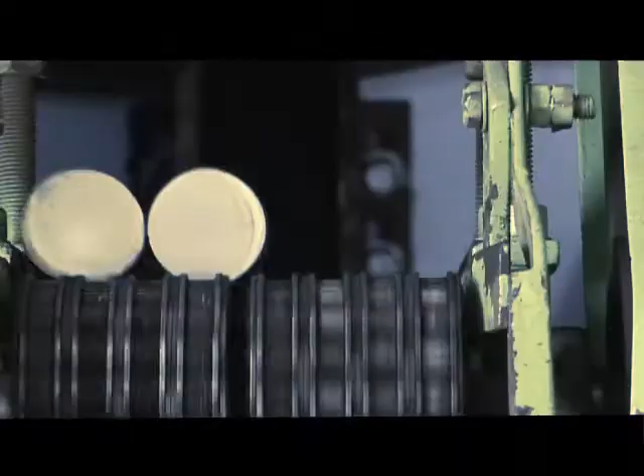Progress, innovation, creativity. To cope with changes in the machine industry of the 21st century, we develop powerful and precise devices, from straight-side hot forging presses to billet chopping presses and peripheral devices, and strive to remain the most trusted business partner. Technologies for companies and consumers, Jaewoo Press is at the heart of them all.

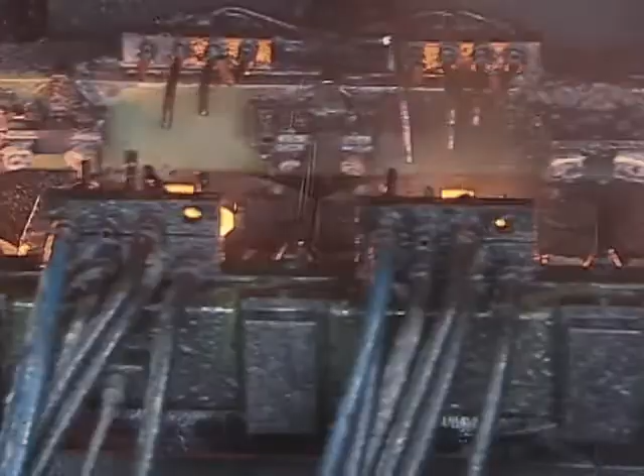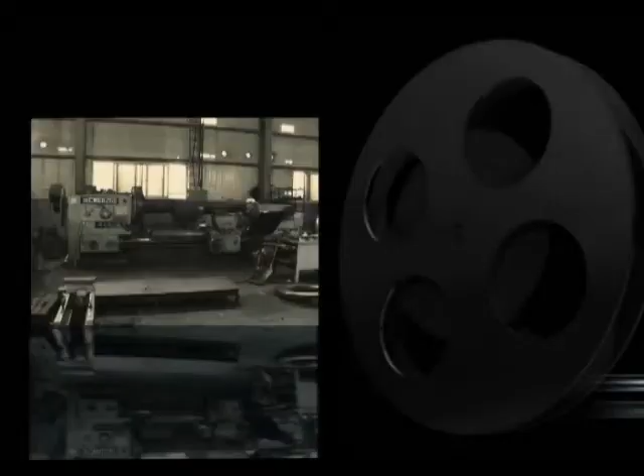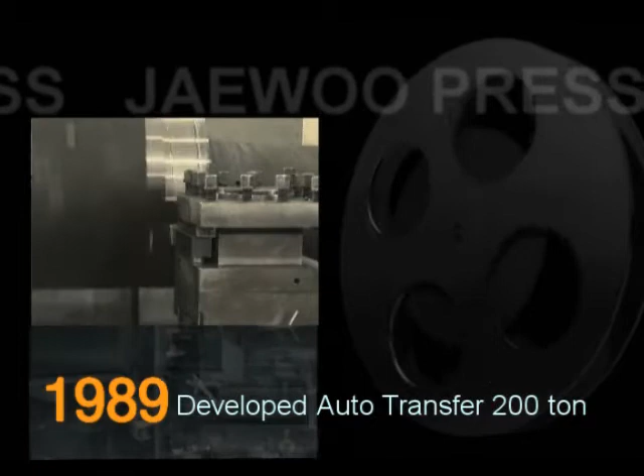Jaewoo Press is located in Ansan, Gyeonggi-do, the mecca of Korea's small and mid-sized companies. 1983, established Dongwoo Industrial Company Limited. 1985, supplied forging presses of 400 ton, 700 ton, 1000 ton, and 1300 ton to the domestic market. 1989, developed auto transfer 200 ton. 1990, developed and began to sell forging press 1600 ton.

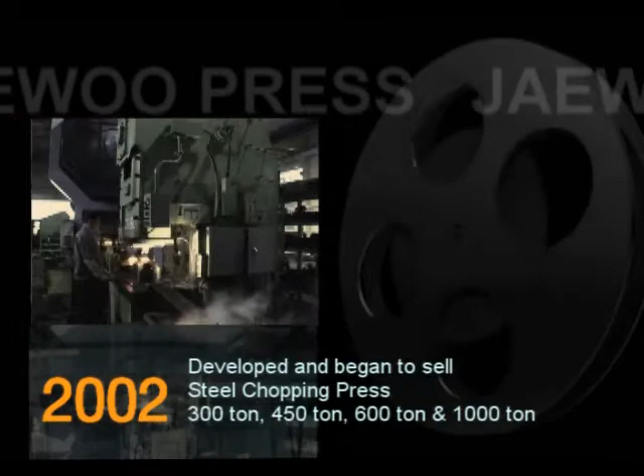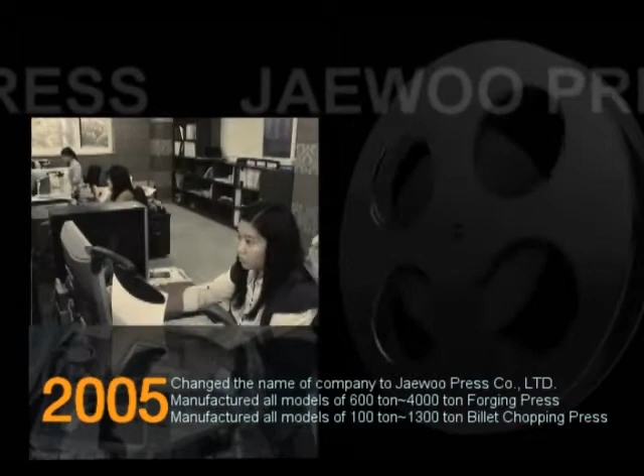1991, developed C-type 1000 ton blanking press. 2002, developed and began to sell steel chopping press 300 ton, 450 ton, 600 ton, and 1000 ton. 2005, changed the name of the company to Jaewoo Press Company Limited. Manufactured all models of forging press, manufactured all models of billet chopping press. The head office was relocated in 2009.

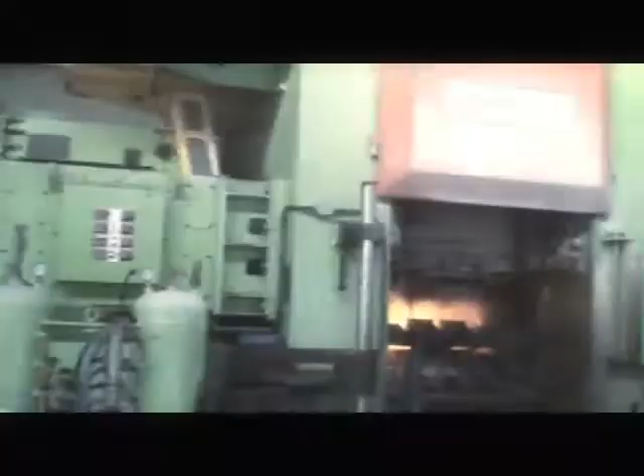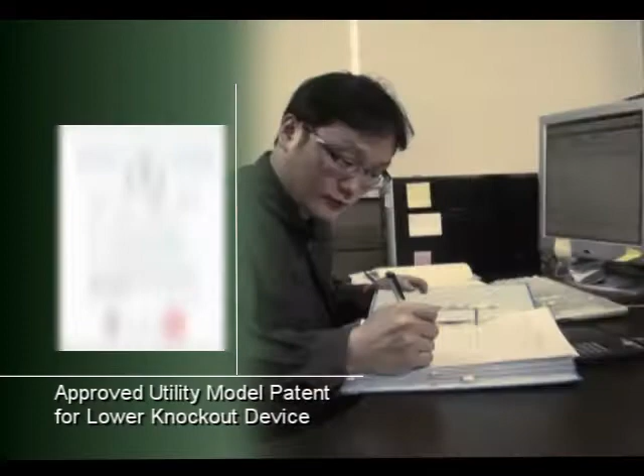And as the leading manufacturer of straight-side hot forging presses, the company is working hard to push the boundaries of Korea's equipment industry with 30 years of know-how and technological expertise. Jaewoo Press has also applied for the patent of the lower knockout device, established the R&D Center, and won the ISO 9001 and ISO 14001 certifications.

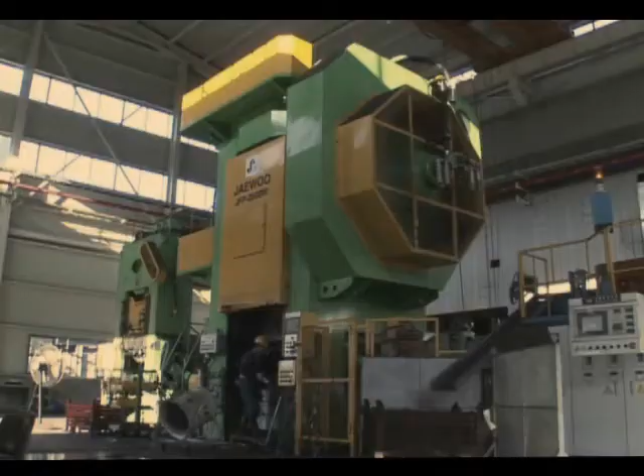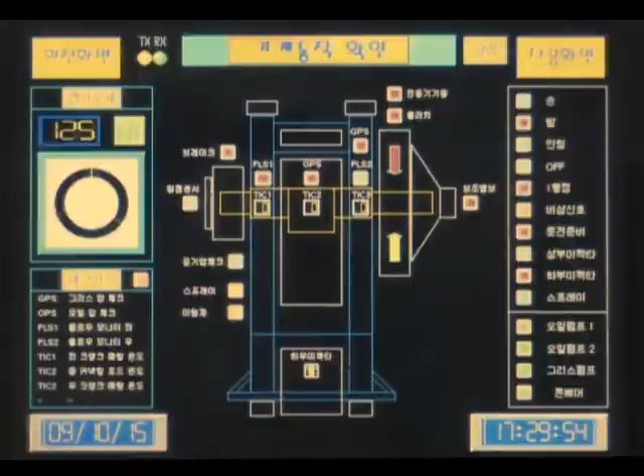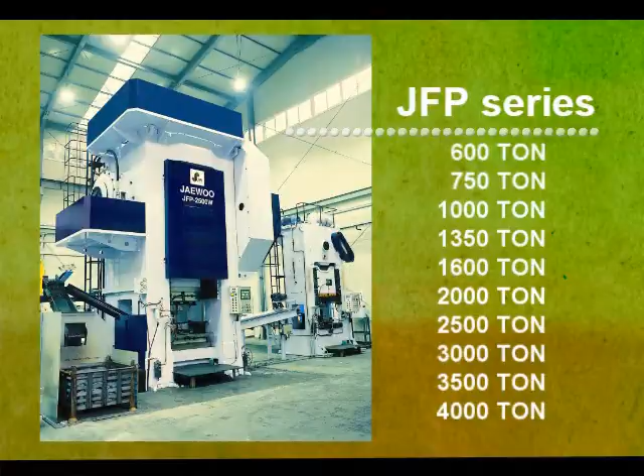Jaewoo Press developed and commercialized the straight-side hot forging press for the first time in Korea and achieved technological independence, emerging as Korea's leading manufacturer of forging presses. Let's move on to detailed information about Jaewoo Press's straight-side hot forging press. First, the capacities range from JFP 600 ton to 4,000 ton. It has a super strength body, a combination of molding and steel structure that protects against transformation, and enhanced life through heat treatment and precision processing.

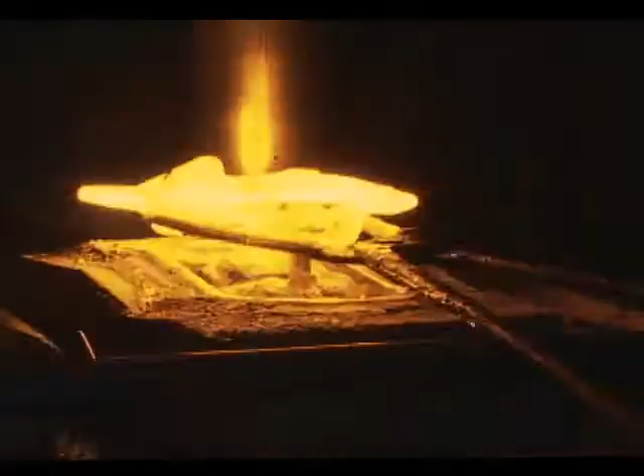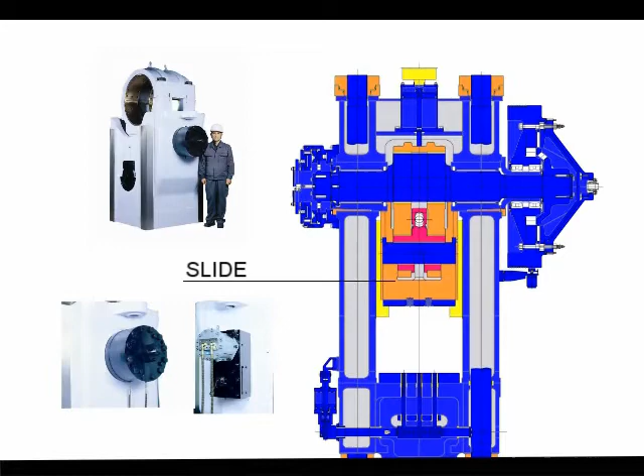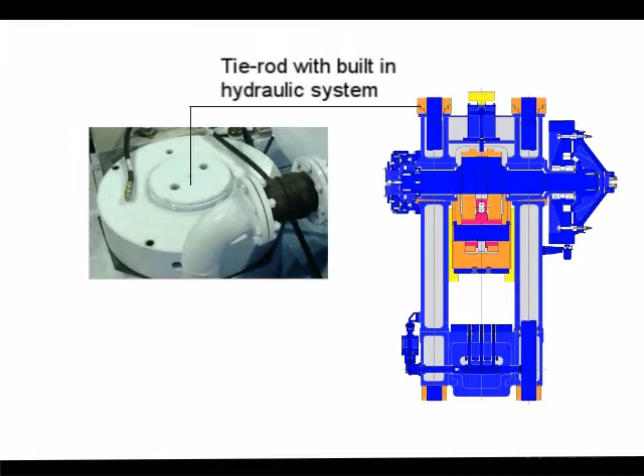The stick release device employs a uniquely designed cylinder and lever utilizing hydraulics for an easier stick release. The tie rod system with built-in hydraulics is assembled with an upper frame and bed, with the tie rod forged by super high pressure to prevent deformation in case of overload and to facilitate the release of stick. The flywheel brake controls the speed of the slide in the case of mold setting and dramatically improves productivity by reducing the mold adjusting time.

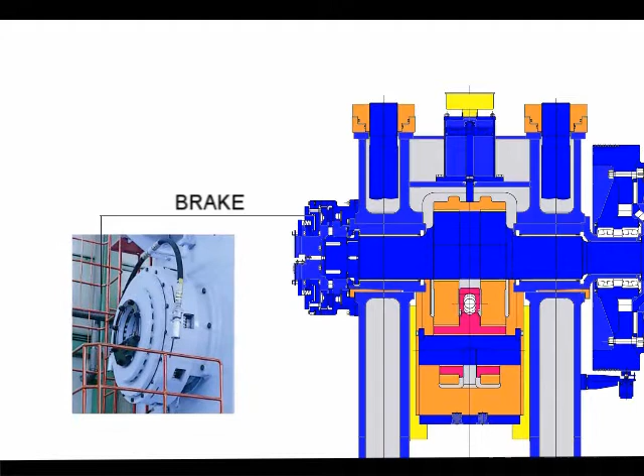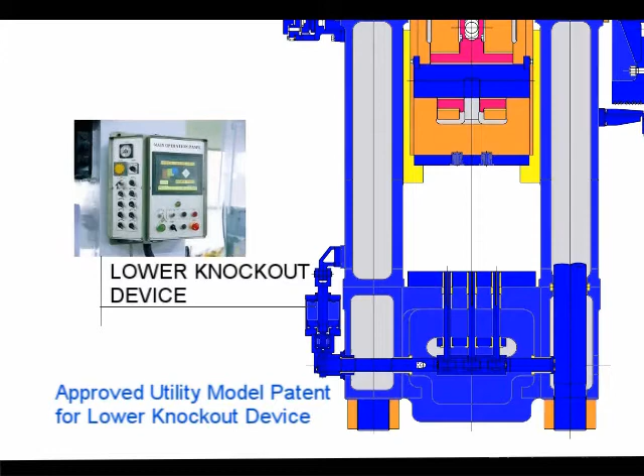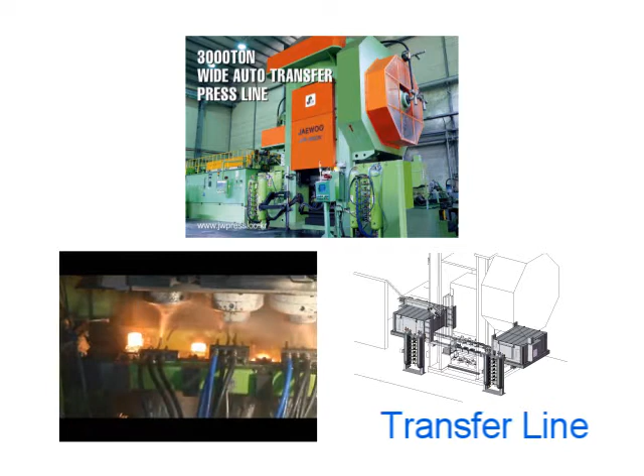The octahedral slide guide and clutch is installed to better cope with eccentric load. The guide can be maneuvered to a minute level, and thus high precision can be maintained. It is an insert type with the clutch and the disc incorporated together. The transfer line is applied with the hydraulic system, which can be freely controlled throughout the entire process, resolving the durability issue of the mechanical system and the position control issue of the auto transfer.

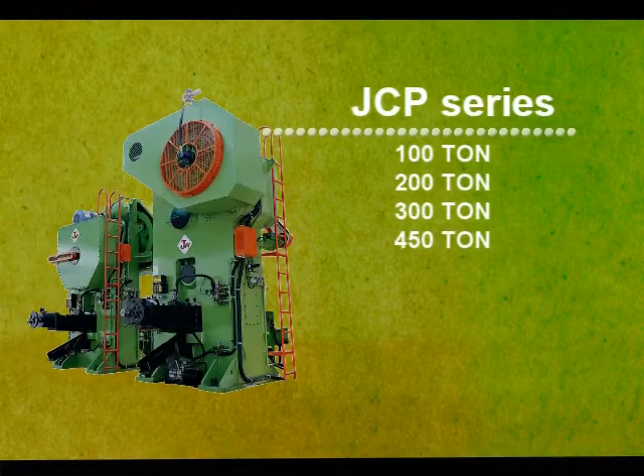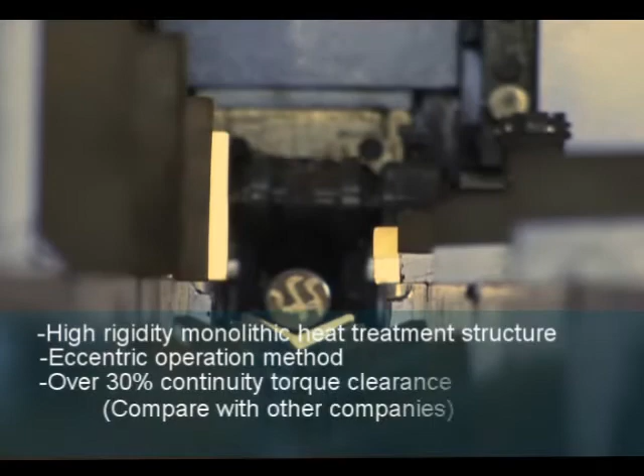Jaewoo Press produces billet chopping presses ranging from JCP 100 ton to 450 ton. The billet chopping press is a super-strength monolithic heat treatment structure employing the eccentric drive. The continuous torque has 30% more allowance than competitors, with minimum material change and precision chopping achieved. Let's take a look at devices mounted on the billet chopping press.

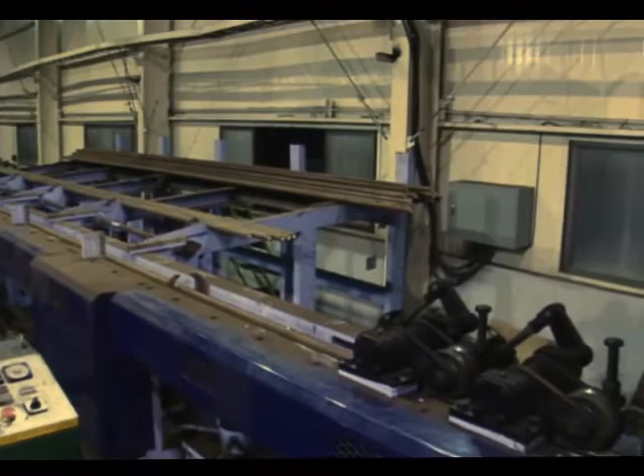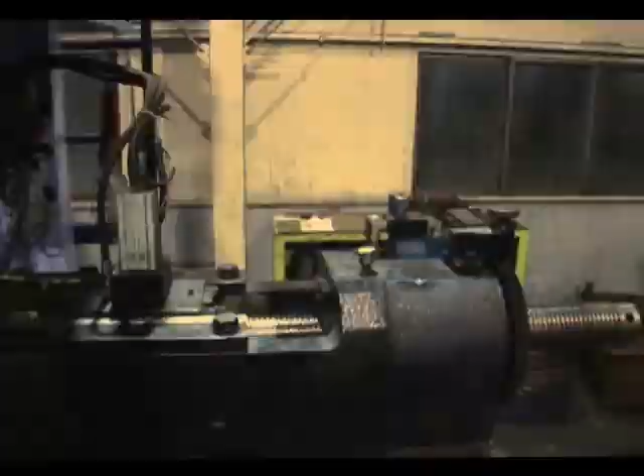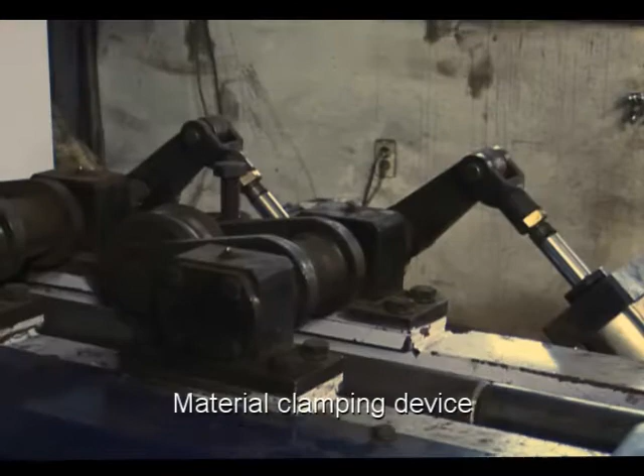The hydraulic stopper drive is easily adjustable with the automatic stopper length adjusting device, and the shock is better absorbed and noise is much reduced when materials are transported from the material damper load frame to the conveyor belt. The material clamping device has a double clamping that prevents backstopping, and the clamp roller prevents the vibration of materials during chopping for increased safety.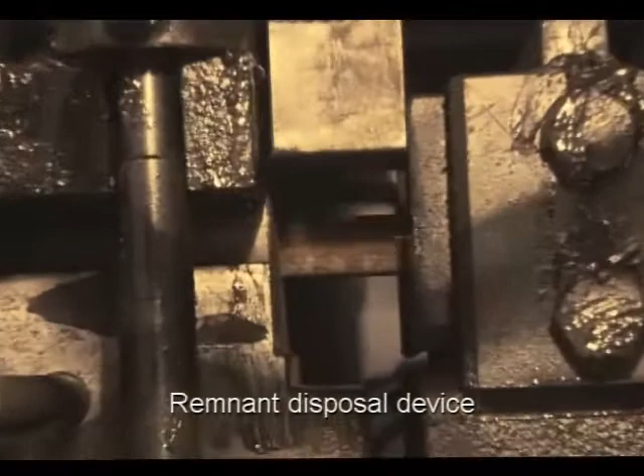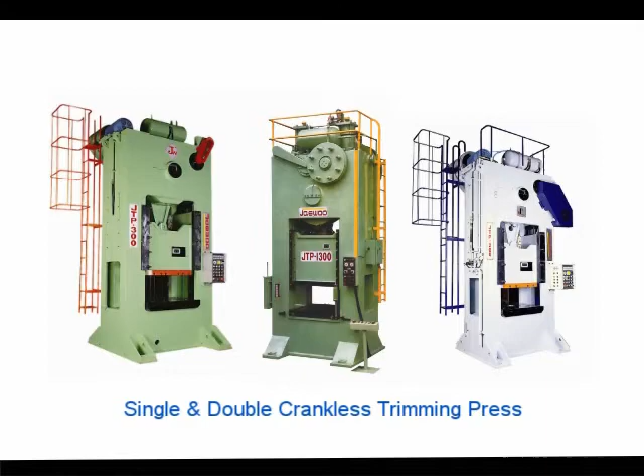The automatic material waste processing device automatically processes waste produced from chopping materials to reduce the generation of inferior forged steel. Daewoo Press also produces the trimming press, diverse specialized presses, and die sets, garnering acclaim from partner companies and consumers with superior quality.

For companies and consumers, Daewoo Press passionately pursues technological excellence and strives to make the world a better place to live. Technologies for companies and consumers. Daewoo Press.